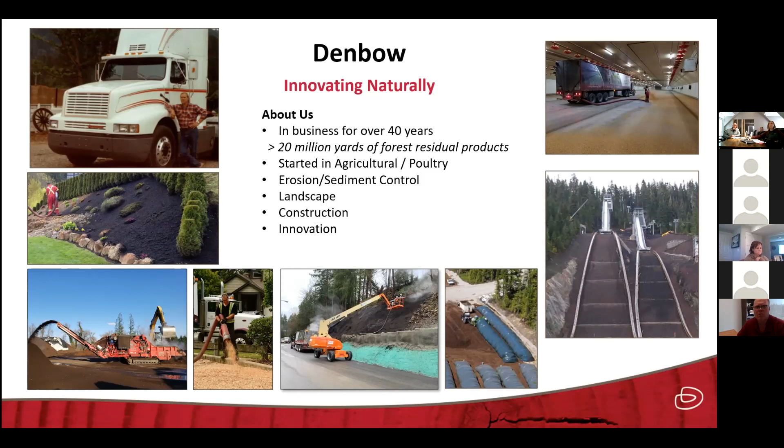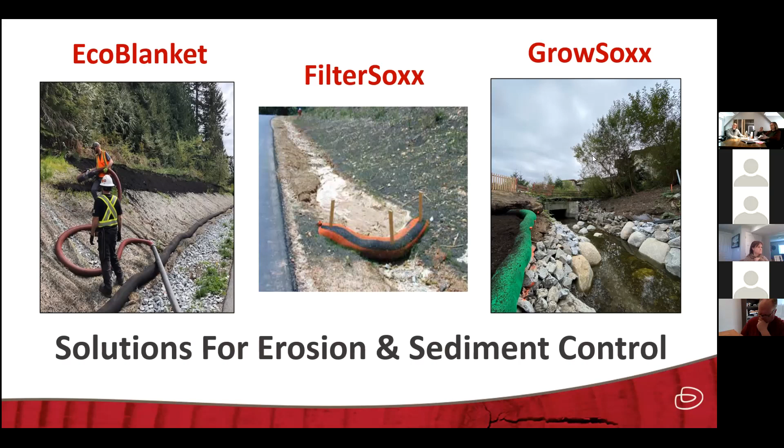So this is a very important product for erosion control. It is an option, the better way versus hydroseeding. I know hydroseeding is done a lot, and in some places it can be successful. However, we really strongly believe in our product, which is Eco Blanket. And Eco Blanket is compost. It can be called a compost blanket, and it is fibrous, allowing water to filter down into the soil rather than running off as with hydroseeding.

Hydroseeding is a quick fix. It looks green right away, but it really isn't growing what it needs to; it's not stabilizing that slope as it should. So grow media with a microblend tackifier and fertilizer are what make Eco Blanket. It's an interesting product if you haven't seen it. The first time I saw it on a slope at a residential site, I was surprised when we blew it onto the slope.

I kicked at it actually, I just wanted to know what it did. And it really stuck to that slope. There was no movement. And that's the microblend tackifier that's in. It's kind of like it glues it to the slope. And so it is an immediate, basically, sediment control right away.

If it's raining, it doesn't affect it negatively. Water won't just rill going down the slope. So it's an immediate application, and we do it with our blower trucks, as you can see to the left. So no heavy equipment is required, which, as we know, can have a hard time reaching places, or you're damaging the area by running excavators or whatever else through. So we have a way with our blower trucks to apply it directly to the slope in those hard to reach areas. Tom, you want to share a little more?

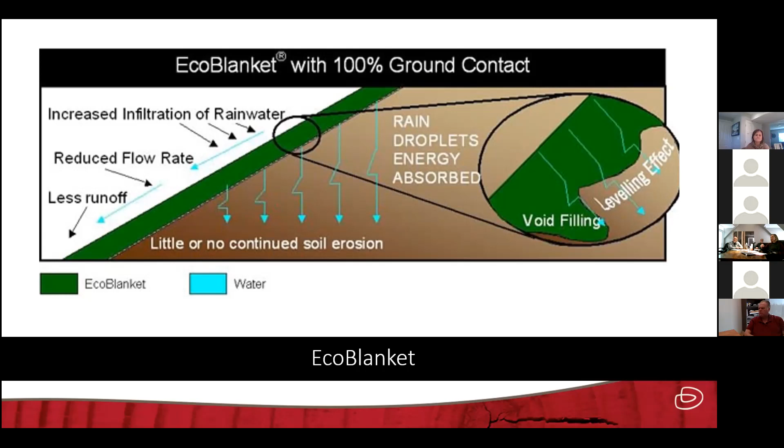Do any of you work a lot with the seeds, or Miriam, you said you're part of the seed specifying in the city of Surrey? Yeah, I was part of the team that was coming up with the specifications, particularly for the different applications, some for riparian areas, some more for meadow, and also noting that with parks, having pollinator species is also important in particular areas. So yeah, I was on the team assisting and coming up with our specs.

Since then, I believe you have copies of our various specs for the different applications. We also have our roadside mix, which just needs something pretty low lying. We don't want anything that grows too big, too fast, because that's hard for the mowers to manage, and also it out competes our newly planted shrubs.

That's fantastic. Like I said, whatever a customer would like to see is what we provide, and obviously zones matter, you know, what you might need in Whistler is different than what you're going to need in the Fraser Valley. So we rely on the specialists, the seed experts, we don't pretend to be that. So that's where you've already had the experience of working with seed suppliers.

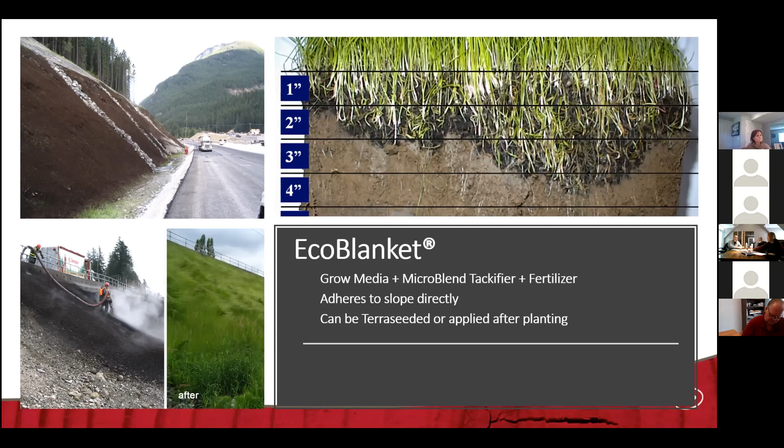Maybe you want to add to that, Tom? No, I think for this, that was great, Michelle. Okay.

As we explained with soil or seed, we can customize. We also do custom soil blends, and it depends on the application you're requiring. Tom is the guy we rely on to help work with our customers on creating soil that could work for their application. So Tom, I'm going to let you discuss our soils specifically.

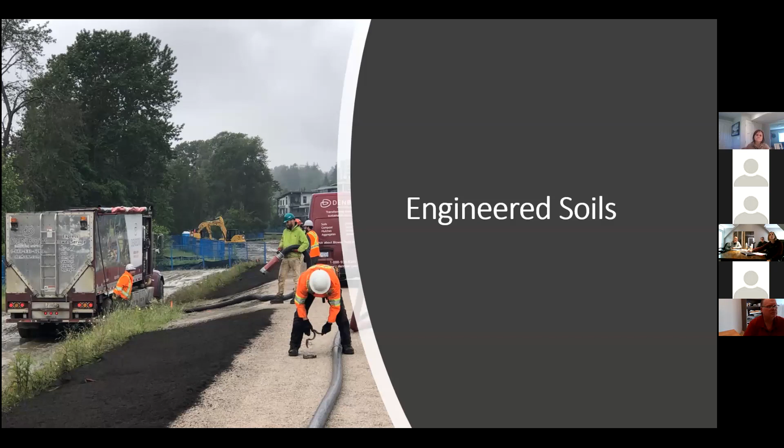Sure. Miriam, is your group primarily looking at the erosion sediment end of things, or are you looking at engineered soils, landscapes, or things like that as well? For the group here today, this is going to be more ESC and operation maintenance type—we're dealing with steep banks, things nearby roads. Occasionally there will be times when we're deeper in the riparian area, but then there's a design that will come out of that from the design team.

Some of this we don't need to spend as much time on. We intentionally put our StructureZone in here because you may encounter this, as it's not always part of the simple landscape plan—it's also a structural element. This is structural soil. I don't know if anyone's seen this, where they'll put it under parking lots, roadways and things, and also use it for planting primarily street trees.

So we do this product, and we've had a lot of experience doing that. We want to point out to the city that should you require this, we can meet specifications. There's a few different variations of how it's done, so we welcome your questions or concerns about what particular makeup of this blend you require. We term it StructureZone as our name, but we apply that name to multiple specifications.

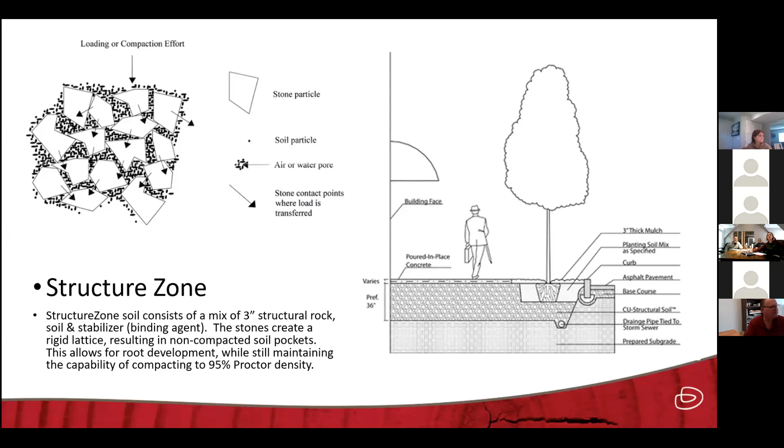So we'll move into something that's really important for you, as we've talked about the eco blanket, which consists of grow media. It's something we produce ourselves, and Tom will explain a little bit more about that.

But again, you hit on something—you're looking for quick solutions, a call away, let's get Denbow out. And that happened actually last week, which John will talk about a bit further. So we always have these products on hand—grow media, we always have it on hand. We make it the cleanest probably in the Fraser Valley because of the way we source our material, which is very important to us.

So you can trust that when we blow in soil or our eco blanket, it will be clean. There won't be household garbage in it, or things like bread clips, which often happen with cities receiving green waste. Humans' household stuff just gets dumped in, so we don't receive that kind of product. Just want to clarify where we source.

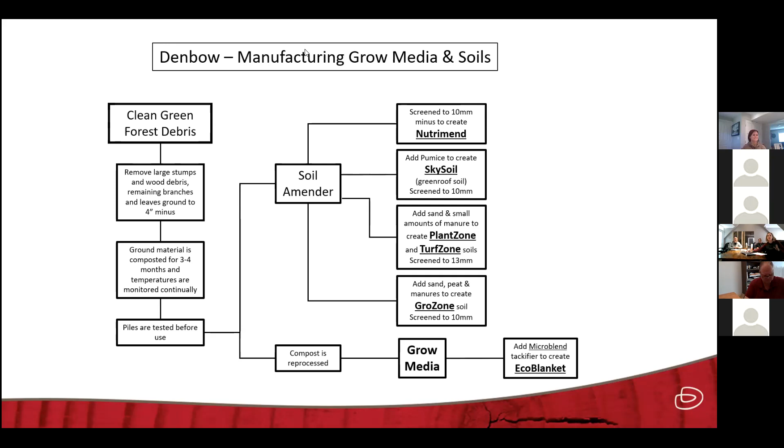Yeah, and I'm just gonna flip a slide. It's quite analytical, and if you're not really into soil analysis, you might not want to know too much, but Tom will speak quickly about what analysis looks like when we take it in for testing and how detailed it can get. This is something we do on a regular basis, so we can provide you that quality control assurance.

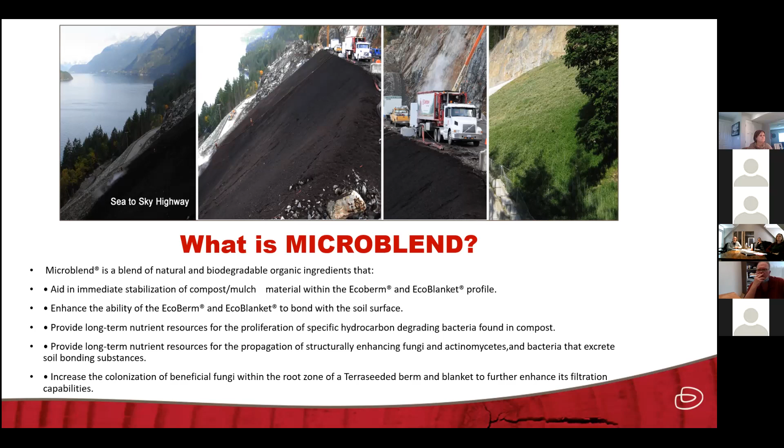Good, okay. And you had asked for, so 2 to 1 is typical for Eco Blanket. And we do work with Nilex products if we need GeoGrid as well. So we can place Eco Blanket underneath, GeoGrid on top, and then blow your top layer of Eco Blanket on top of that if you're really working with steep slopes.

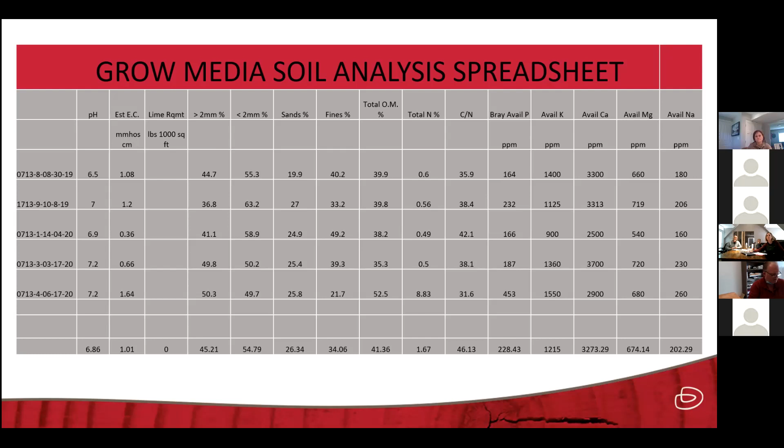We have about 10 minutes left. Are you guys in a rush? I mean, we can stay a little longer if you would like. Okay. All right. Sure. Oh, sorry. I was gonna say, probably what would be more of interest is to really just run through and show the various different products quickly for those who aren't familiar with it.

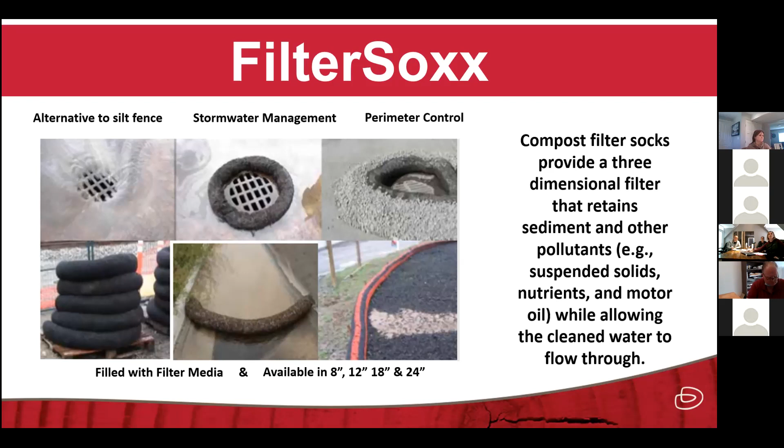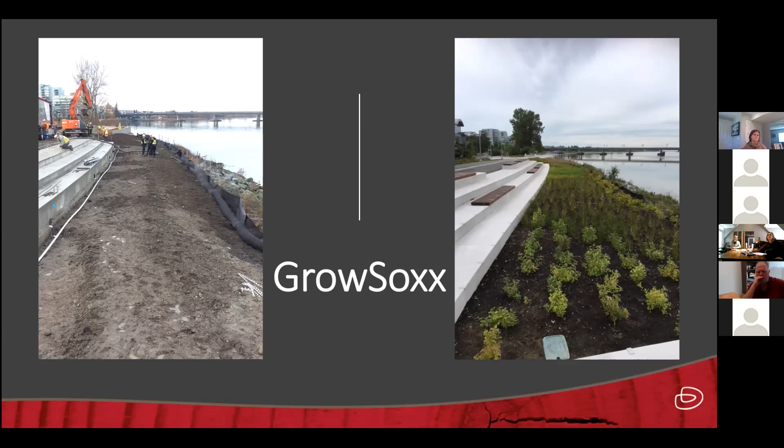I was just going to point out, if you look on the picture to the right, the silt fence is still remaining at the end of the project as garbage. Yeah. It has to come back and get removed. And it wasn't really the application of the grow sock. When it does get moved, right? Yeah. Caught up against it. So yeah, it's kind of an obsolete BMP in that regard.

Have you done a cost benefit analysis between silt fence and grow socks? Like, it must save a lot on labor. Yeah. It's saving on labor. And if you're making your construction crews remove it, you obviously got landfilling costs with silt fence. So if you really take into account all the extras that you don't really consider when you price per linear foot silt fence to grow sock, grow sock is going to appear to be more costly up front for sure. However, if you really did all the math, and others have done it, it's very much in line with each other when you account for labor, disposal, removal, and going back and checking and maintaining. The maintenance to do it properly is never even considered. Silt fence is supposed to be monitored, so consider all of those extras.

Plus, not in every case, but it's often a permanent installation, so it's functioning in a permanent fashion. It will break down over a period of time, but the structure of the material will remain in place and continue to function. I think also to note is how much destruction the removal of silt fence can do, especially if you have a contractor that came in and keyed it incorrectly. And then we start having the planting and the growth on top of it, and then try to come back and get it. You're just destroying a lot along the silt fence as well that you have to come back and fix.

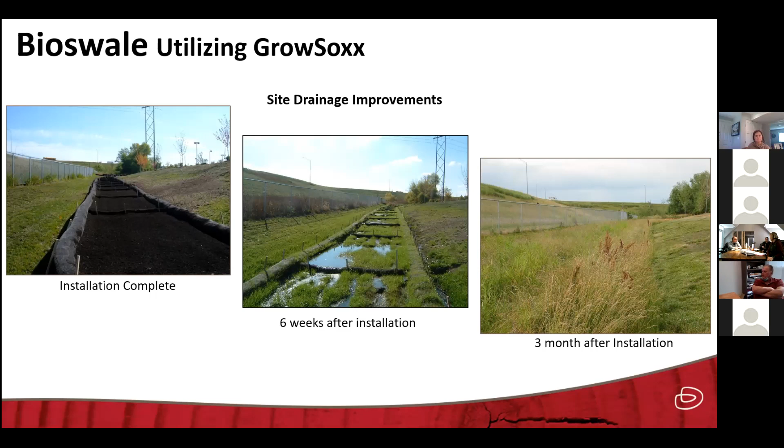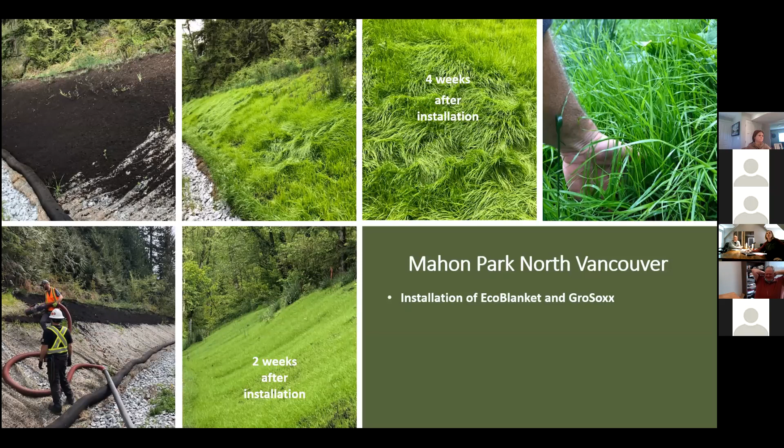This was a failed product. The initial was coco mat, and they had hydroseeded. So again, not successful. The residents were unhappy with it, and City of North Vancouver had their own coastal seed spec, just like I said about seed specs. They called us in, and it looks beautiful. The neighbors are happy, the customer's happy.

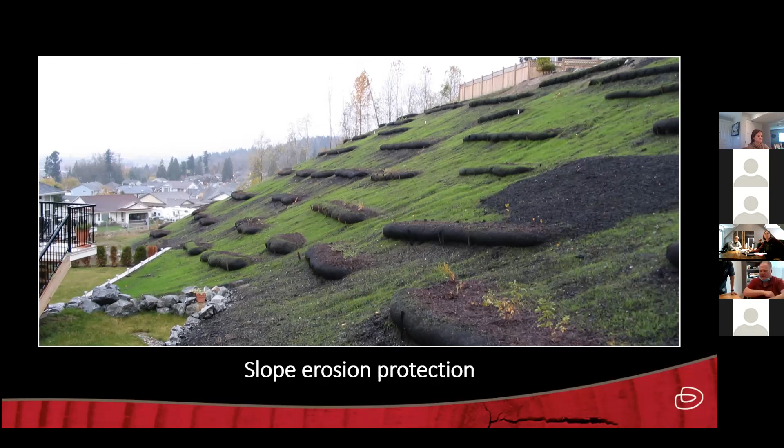Unfortunately, I don't have an updated picture. I sure would love one. But I guarantee it's all green, and you likely don't even see the grow socks anymore. So let's just get right through, because we are time constrained. We're going to talk about this, and John's going to speak to this. This is very recent here.

John? Yeah, this was the reason we wanted to introduce this quick slide here. This addresses Miriam's point about people in the field being able to contact us, and we have a solution that we can apply very quickly. This particular one is just off of 16th Avenue. Maybe move forward to the slide there. It was off of 16th Avenue by Little Campbell, where there was an issue with bank erosion.

City of Surrey crews came in and placed the riprap there, and we were called in to provide an eco blanket solution above that riprap to basically augment its work and create a scenario where any sediment does not get down into the Little Campbell. So we took the call. We went in. Within 3 days, I believe, Miriam, we were there on site, and our crew was well prepared and placed the eco blanket solution in. It was terraced to a certain spec.

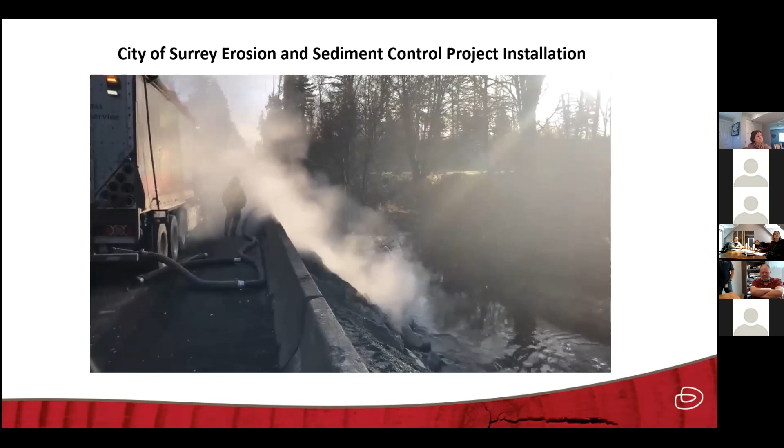If you go back, there's a quick video which we wanted to put in because it shows how efficiently the crews can apply. You see our truck there. Just to show you the efficiency of the crews and how we actually install the product. Traffic control was only required for about 3 hours on site. It was done on a Friday morning. And after we had left 3 hours later, this was the result of what you see.

Are there any questions on that specific job? Did you say these two were taken a couple days apart? Yes. What's interesting is when you first see the first picture, you can see some of the product on the rocks, and you'd expect that to go away, but it looks like it's adhering quite well. Yeah, that's the microblend. That's the magic of the microblend. I'm not 100% sure, but I believe we did have a couple smaller rain events between. So the adhering was really quite good.

You don't have any pictures since it vegetated? This was actually very recent, I think it was only 2 weeks ago. So we should be seeing some vegetation on it now. My plan is over the next couple of weeks to pop by the site and get a couple more pictures for Miriam to distribute to you guys.

Where is it on the Little Campbell? It's very easy to get to. There's a sidewalk along that concrete barrier on 16th Avenue. It's right by the 9300 block. Okay. And actually, it's on my list to swing by this site on Tuesday morning.

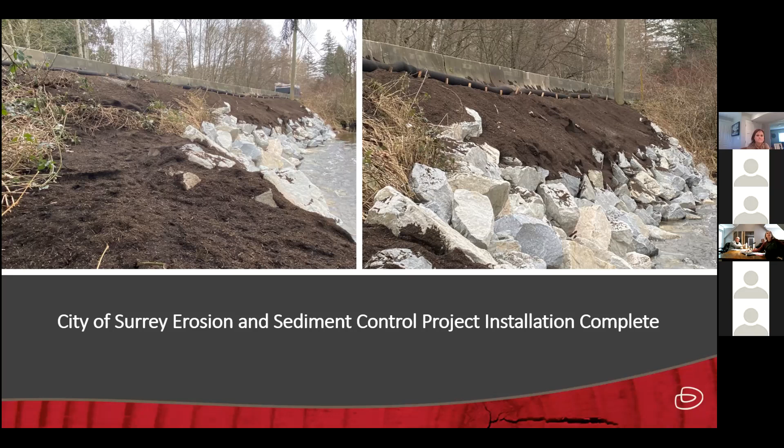Excellent, fantastic. Is everybody good for time? We're pretty much out of time. Just gonna quickly show a few more things that are important to you.